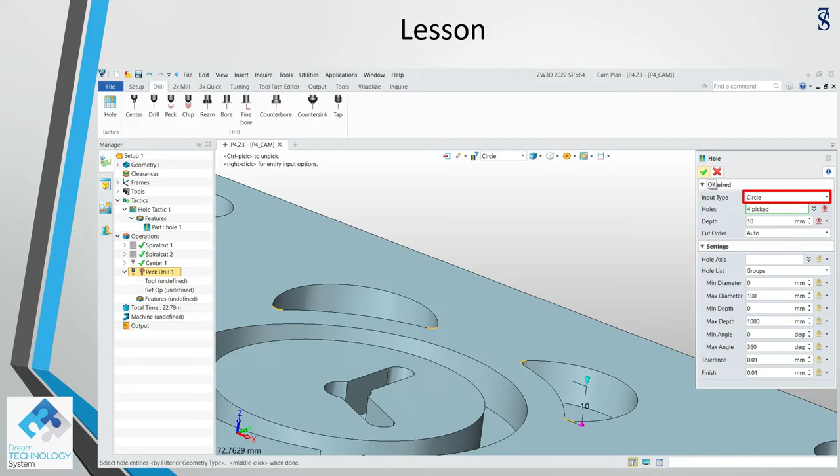Create hole. OK. We will go into the hole set creation circle, pick all the 4 circles, and then click OK. We will click OK to complete the hole set. Select the tool, loading the tool shape, set to drill, select 3mm twist drill, and then click OK. With that, this is the result on the selection of the drill.

We need to set the tool number 4, and then click OK. Right mouse click, we need to edit the parameters. First is going to be the frame G54, continue with RPM and the feed rate. Update the drilling operation detail. You can see 10 is the maximum depth and then 0.5 is the balance material.

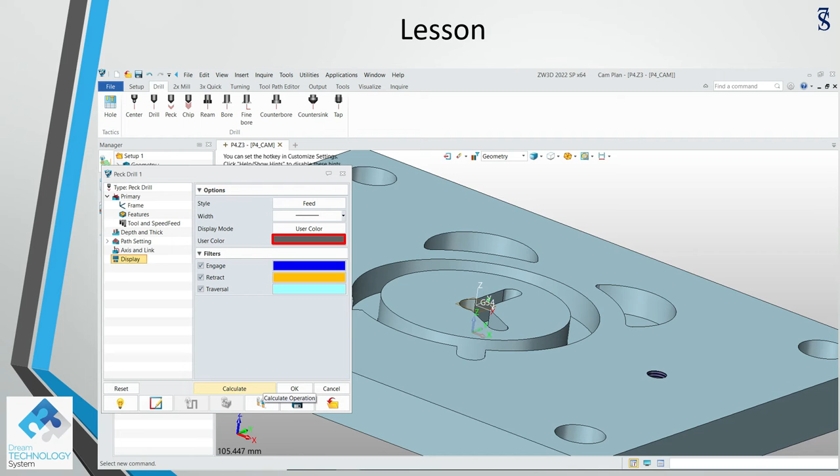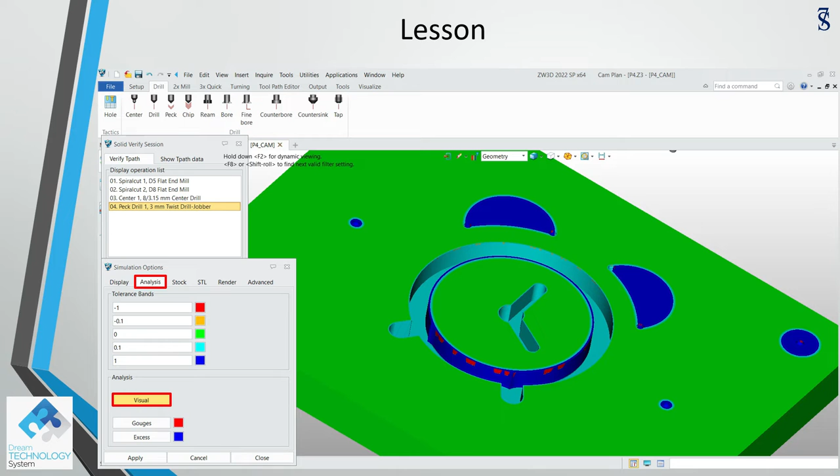Select the color, calculate. Looks good, let us go for verify. Set the frame G54, you can see Z is minus 9.5, which is to our expectation. Click OK. Click OK again. We're going to perform a solid verify and then use the analysis to check whether the drilling operation is okay. Looks good. Everything is to what we expected.

Save the file. Let me switch the screen to show you step by step how to complete the task. Hello, welcome back. Let me show you step by step how to complete the task.

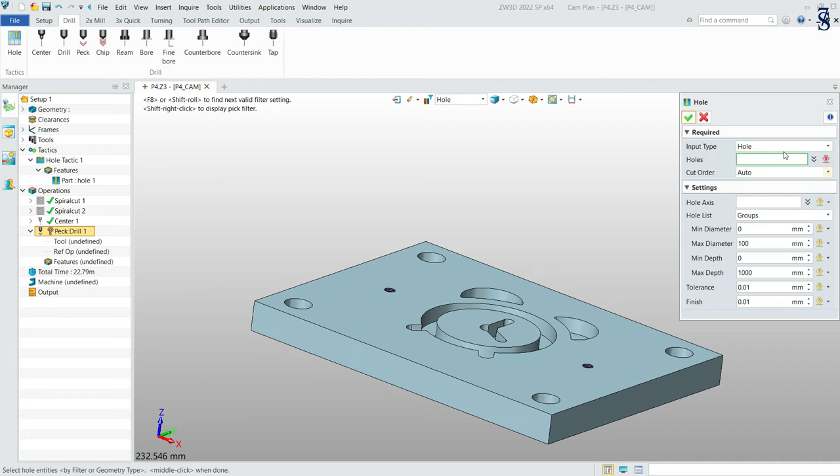First, we double click the previous operation, collapse it, go to drill, peck, create, OK, change to circle, zoom in, 1, 2, 3, and 4. Click OK. OK again. Load the tool shape. Select drill. 3mm. OK.

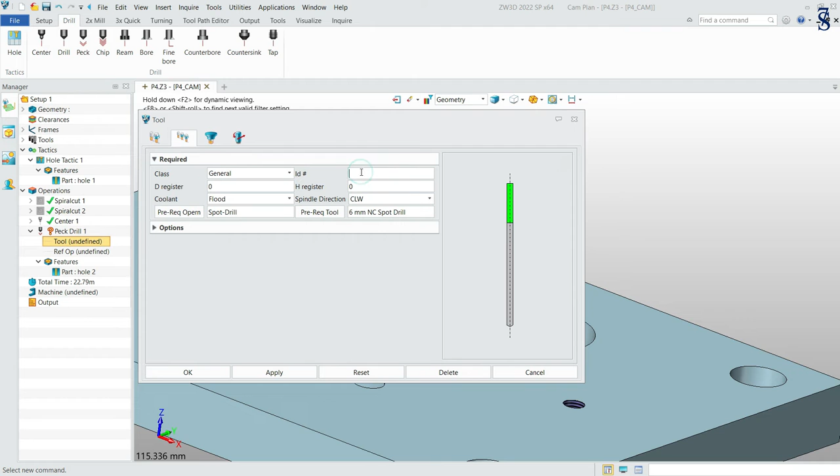Set the tool number. OK. No, we're not going to calculate. Set the frame. G54. RPM 1002. Feed rate 150. This is 10. 0. Tip 0.5. 3.

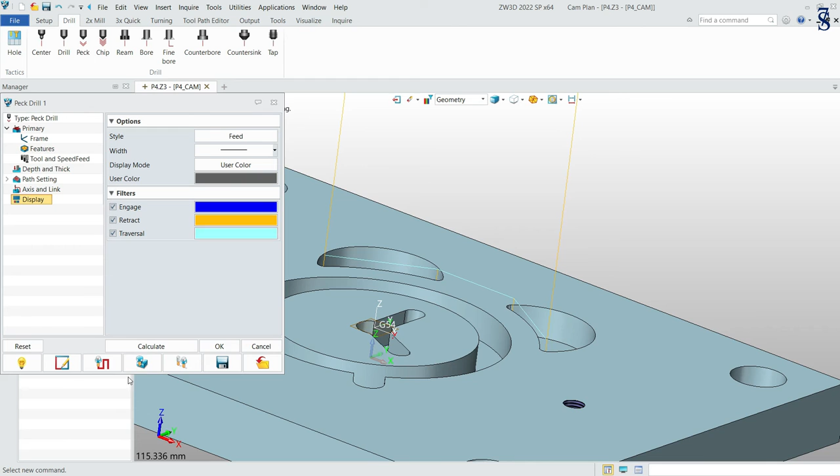Display set to color. Calculate. Looks good. Let us verify. G54. Can drag the drill. Z minus 9.5. Yes, to our expectation. OK. OK. Let us do a solid verify. Slow down. Play.

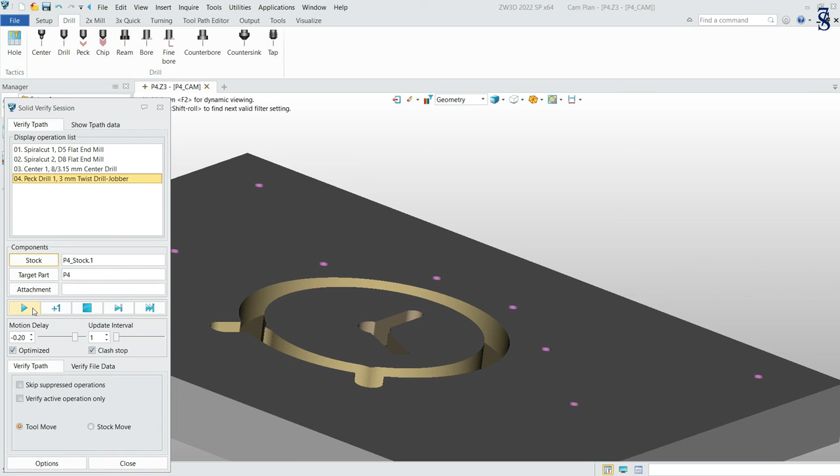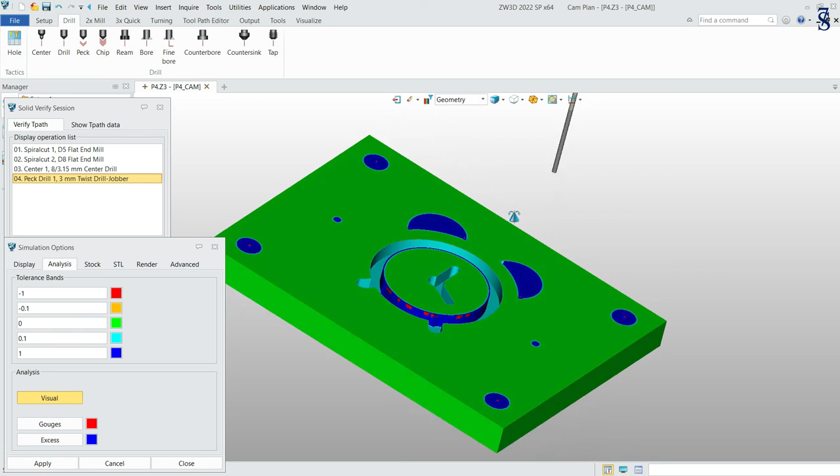Yes, this is what we want. Let us take a look. Visual. Zoom in. Take a look at the hole. Looks good. You can see the balance of the 4 holes. OK, to our expectation. Close. Close. We save the file.